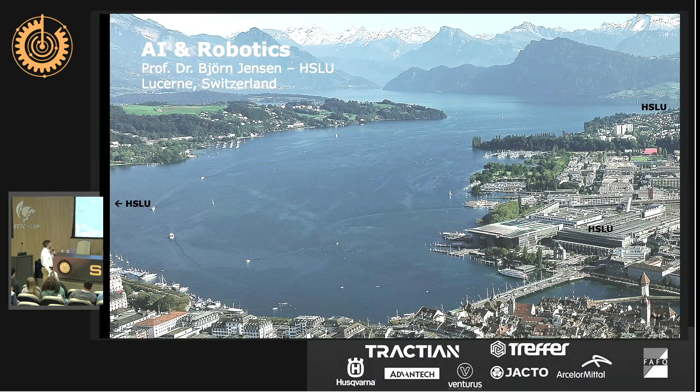So maybe you have been to Lucerne. I already met somebody who visited Lucerne. On the left-hand side we have the Rigi, on the right-hand side we have the local mountain, Mount Pilatus, and this is where we do our research and we work on our robots.

I wanted to emphasize where we're located, and it was quite difficult to get a view on the world where you have on the one hand São Carlos and on the other hand Lucerne. So I think if we drill a tunnel, and in Switzerland we drill a lot of tunnels, then chances are we would end up in São Carlos. But that just goes to show that if we interpret this as a mathematical implementation of a sphere and we fold it somehow in a hyperspace, then I'm sure we would end up being neighbors in the dimension of AI and robotics, which is something we all enjoy doing. So there's a similarity, there's a neighborhood, and we should definitely search possibilities to exchange ideas.

I'm going to start with the robotics part in a second, but just indulge me for the statistics on the home institution. The Universities of Applied Sciences in Switzerland were founded 25 years ago. That was a new development. We have currently 6 different schools, and roughly 2,000 people are working. We have 40 bachelor degrees.

Who of you is studying in a bachelor degree? All of you, okay. So which bachelor degrees are you in? Mechanical engineering, electrical engineering, mechatronics. Haha, very good choice, excellent choice. I tell you why in a second.

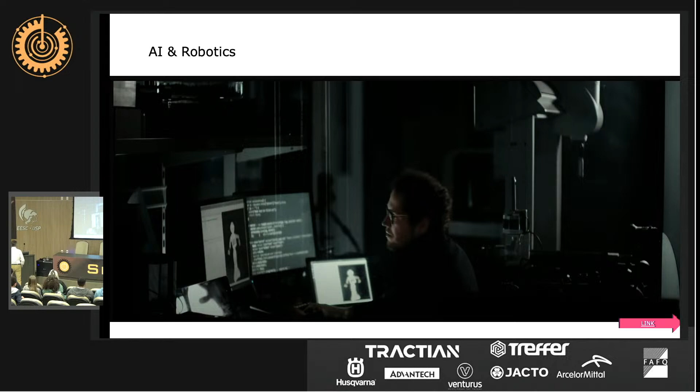Okay, so we have different areas where we are active. Of course, we do education, so the study programs, in the bachelor and the master. We have continuing education, so we keep contact with the people in the industry. We have applied research, and we also offer services to the community. In the last year, we launched nearly 380 new projects, most of them research projects, most of them in collaboration with the local industry in central Switzerland. And with that, I would like to delve into a study program.

Just switch. So you are all in mechatronics engineering, this is the field I work in, and we created a new study program. Unfortunately, the people will be speaking in German, but we have an online translation. Oh, very bad.

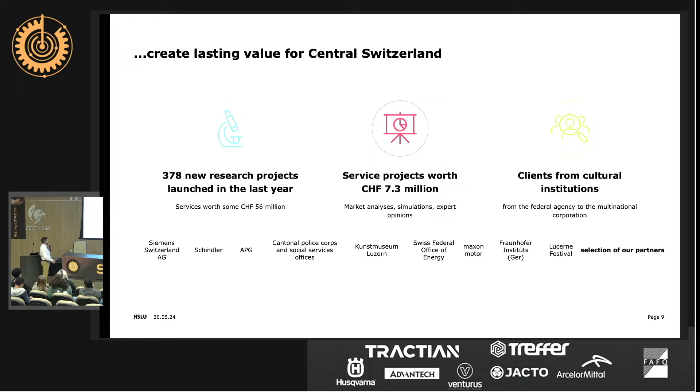They're very recent, very nice, and we attracted, I think, over 1,000 students in the last 5 years, so that is a tremendous success. All working in computer science, and a good part in the area of artificial intelligence. And now we also offer in the bachelor area robotics and artificial intelligence as a major. So we will lead them to the mechatronics program, to data science programs. Those are some companies we work together with, Siemens, Schindler. You probably know they have their headquarters. And then Fraunhofer, Maxon Motor, you're probably familiar with. So we have a number of interesting companies to work with.

We are working in 2 major areas in our research. One is focusing on spatial development and society, so that despite the changes, society functions. And the other one is digital transformation of the working world. And now, how does that look, the digital transformation of the working world? I'll give you an example. This is one of my robots.

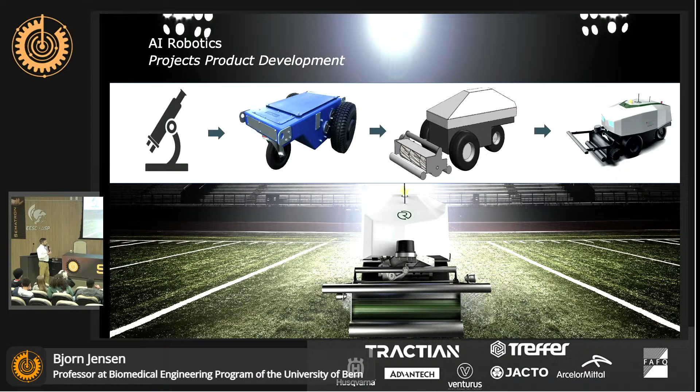In general, what we do is we are involved in research projects in my research group. That is innovation, closely collaborating with companies. Companies come to us with a challenge or a new idea. For example, here, that might be a fitting example. Here we had a company that wanted to create lawnmowers for soccer fields.

And the reasons being manifold. On soccer fields, the grass is very heavily used, so it doesn't have much time to grow. If you have your greenkeeper, usually he would be sitting on a lawnmower, but that adds just another 100 kilos to the pressure on the soil, just making it even harder for grass to grow. And it needs to be mown several times to have that perfect shape.

And ideally, the path you take is optimized, because on television you want the individual leaves to be folded in just the right direction to give the logo of your club or a nice pattern in the television cameras. And all this requires a lot of work. So the idea was, isn't it possible to do that with one of the robots? And this is a project that started very early on, and we could come up with creative ideas.

And one of the first things we realized in this kind of project, we cannot use GPS. Because most of the soccer fields have these surrounding places for the people watching the game. So there are walls, there is impediment to GPS reception, it's very limited, which gives you very coarse information and even spurious readings. And that would be terrible, because we need here a precision of approximately 1 to 2 centimeters on the robot to be able to trace the line directly to the penalty point or directly along the penalty area or the middle line.

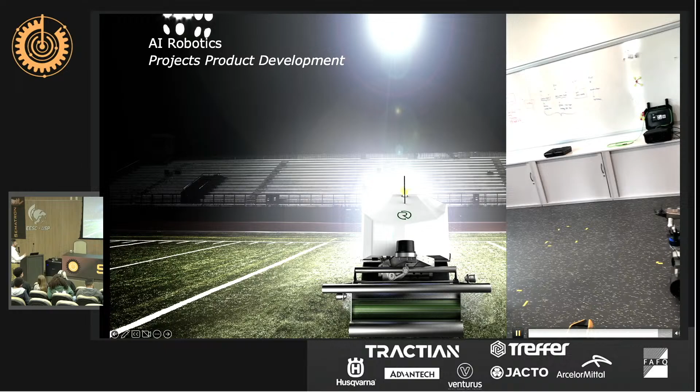And then you have two different ArUco markers. One allows the robot to follow you, so it will track the person and it will get an understanding of where the person is. And the other one is back up, because maybe you run into a one-way street and want to back up, and then you just switch the ArUco marker, and the robot will know how to back up.

Another interface that we developed, because interacting with the robots we usually have a lot of information, is using virtual reality. I'll show you in a second robotic competitions in which we participated, and we realized it's vital that the people working directly with the robot have as much information as possible. So what we did here is you see a 3D model of the environment.

This is our campus in Horw. And you see Mount Pilatus is also in the background. It's modeled. And the student on the right-hand side is equipped with virtual reality technology. He did his master's thesis during the pandemic. So he just started, and then we needed to virtualize the entire development because we were no longer allowed to come to the university and work on the project. That was an additional challenge that we faced.

And now we try to give you an idea of our campus. And now we're diving from the sky to the campus, to the green area in front of the campus. The following four buildings, they are the campus. And here you have the robot. You can give the robot a goal. It's running in simulation due to the pandemic, but it could have been one of our real robots as well.

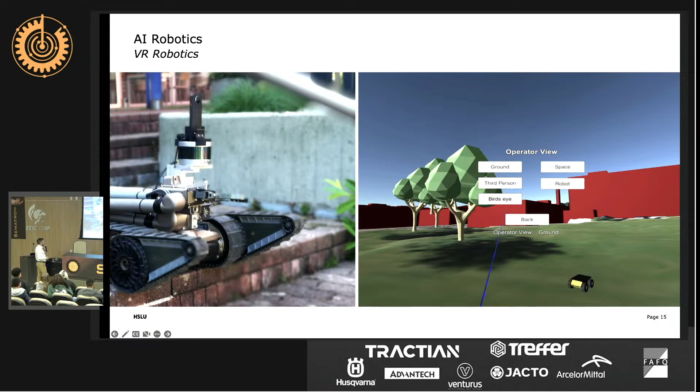Whenever possible, we participate in robotic competitions. So here I'm going to talk about a Eurathlon competition that was inspired by the Fukushima incident. So probably you still have memories of this when we had the issue with the NPP in Fukushima in Japan, and then soldiers were sent out to measure radiation. And it was really striking that in a country where so many robots are deployed, where there's a lot of robotic research, that in the case of an incident with really dangerous materials, still we would send people to the rescue. We would send people to take the measurements.

And this is in a framework of the EU that a colleague from England created that competition and said, okay, let's check if that were to happen in Europe, where would we be? If Japan isn't in the position to use robots, where would our robots be, and what would we need to be in that position? So they created a grand challenge that was a 1 week competition, and we were required to search for missing workers. So the idea is there's an accident and there might be some people hurt, maybe not able to move. Can we send in robots just to map the position where these people are, that when we send in search crews later on, we would exactly know where they are.

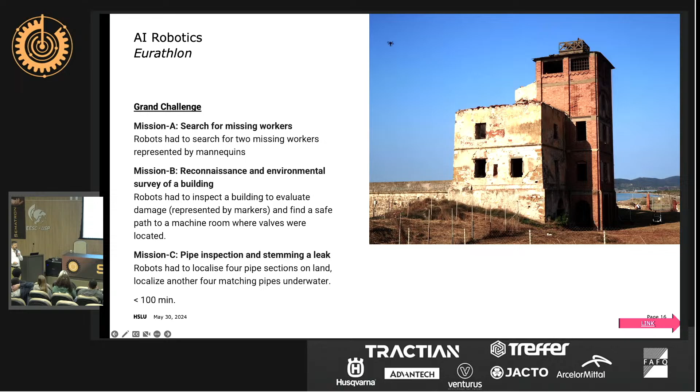This is the location, so it was a disaster simulation. Funnily, it took place on the beach in Italy. So you can imagine you have blue sky, you have sun, and you're on the beach. It's not very catastrophic, but it's just a simulation. It's a first start. And we had a multi-robot competition here. That was a major challenge. So it's not only the PackBot, our land robot that we needed to bring to the competition, but also we needed a drone. And we needed a submarine.

And I have never worked with submarine robots. The drone, we just bought one and we tried to make it work. It was a disaster, but it was necessary for us to qualify. Okay, there were other universities that were much better, but the submarine, I don't know. Fortunately, we could partner with another University of Applied Sciences from the northern part of Germany, from Kiel, that have been participating in submarine challenges for a long, long time. And that might be interesting for you.

Submarine robots is a great thing. A challenge is just if there's a problem, usually you kind of lose your submarine, because if there's a leakage, then everything is broken and you need to start from scratch. If that happens to my land robot, it will just run into a wall and I recover it. It's much easier. So it's a very challenging situation, and we just met on site. So we were grouped together online, and then we met on site, and we had 1 week to make it work. And that required also that the robots talk to each other. That different machines, different research groups talk to each other. And then the area for the competition was as follows. It's maybe hard to see.

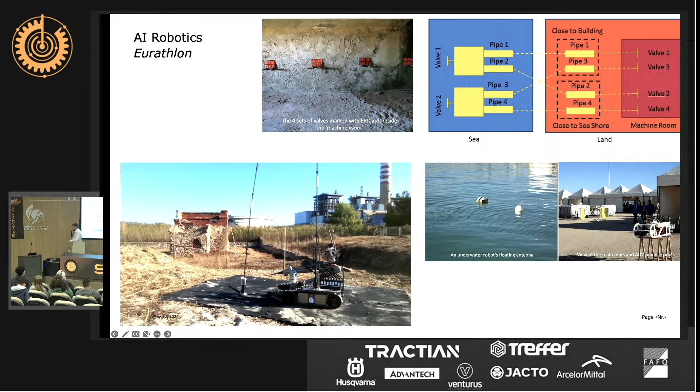The other thing you also see is the indoor nodes. So these are the outdoor nodes for the beach, and all these here are hacking devices, Pineapple hacking devices, which we just modified, and we could drop them on the floor, and they would create our mesh network. This is what you see over here. This is the mesh node dropping on the floor.

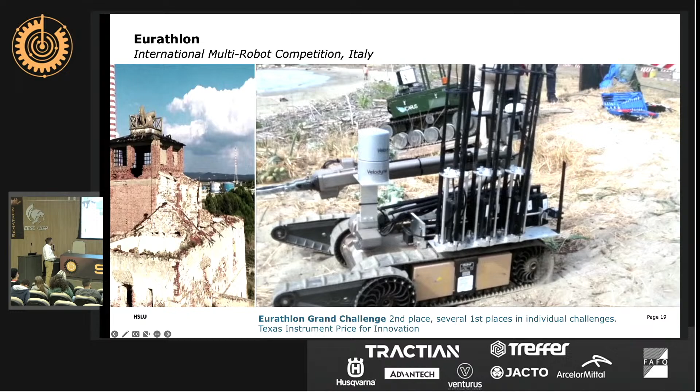We were quite successful in that competition. We went there with 2 bachelor students, so a small team, and we didn't have any expectations. And then after the first run, and I'm going to show you parts of that first run, we realized we can really compete with the other guys. What you see here in the image is the 2 teams that came in second in the Grand Challenge. That is us in the foreground and Icarus in the background. And the funny thing is, Icarus is an EU project that received multi-million dollar funding. We had a very tiny budget. We just had a great robot, and we received the Texas Instrument Prize for Innovation.

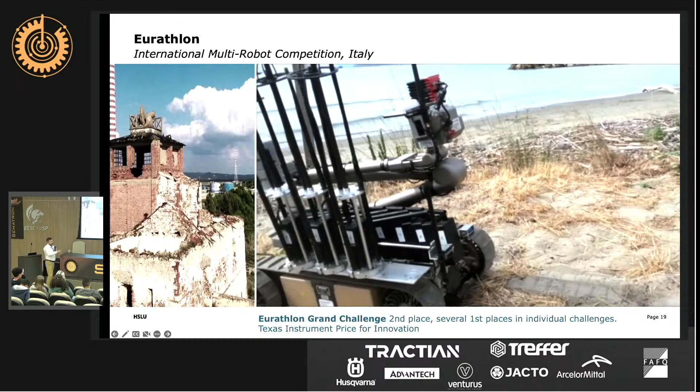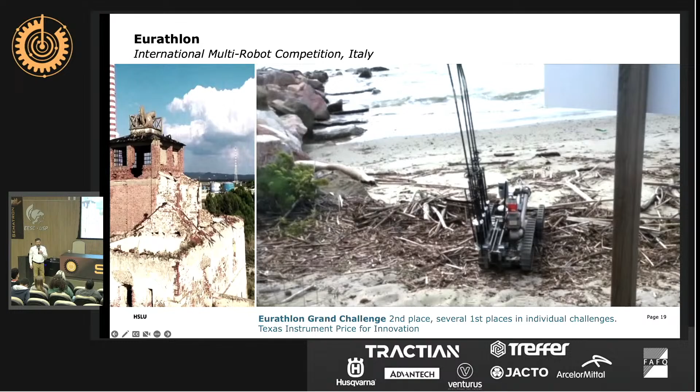So here we have all our outdoor antennas. This is a little bit mean. They wanted to help the robot and put wooden boards there. But wooden boards with sand, that is worse than an ice skating rink. So it's not the fault of the robot that it couldn't go there. We went directly over the beach. You can imagine the odometry of the robot was very bad in that context, in particular since we had a track-driven robot. We have an old Velodyne 3D laser. That red thing is a 3D camera. We have GPS information, so we could teleoperate the robot and tell the robot to go to the next waypoint. So it was not completely autonomous.

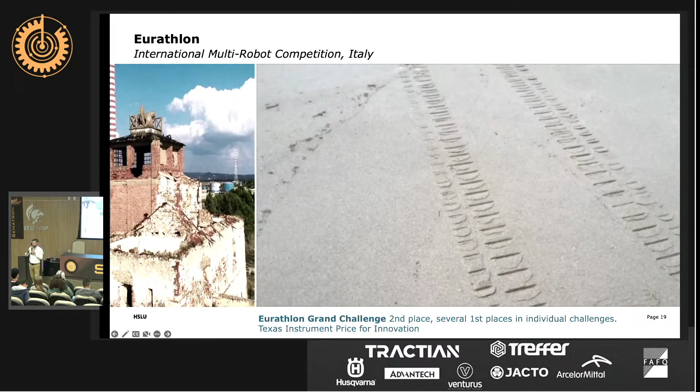That was a decision we took initially. We said we're a tiny team. There's only so much we can do. Let's do that interactively. So the robot was moving there.

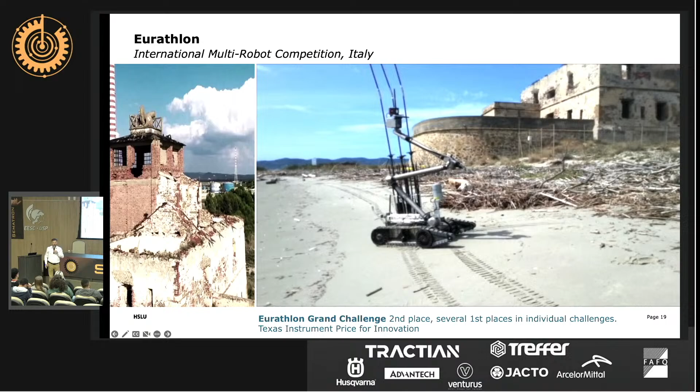In the yellow structure, this is part of the piping to be detected. And there you see the structure in which we had the machine room. So it's a defense structure from the Second World War or even earlier. I'm not going to show you the thickness with the hands because then I will move the microphone, but it's at least this. So no way that you could get Wi-Fi signals directly through.

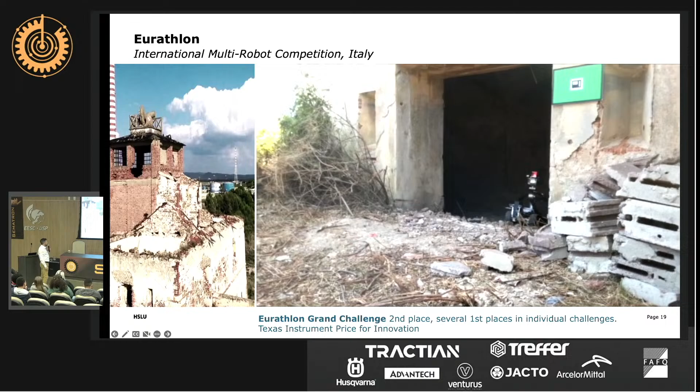And then we had to go behind the building. We were always hoping that the building with huge chimneys we would get next year, and then enter. Here you have an OPI that was detected with the camera, and we had to move over this kind of rubble. And the robot was distributing.

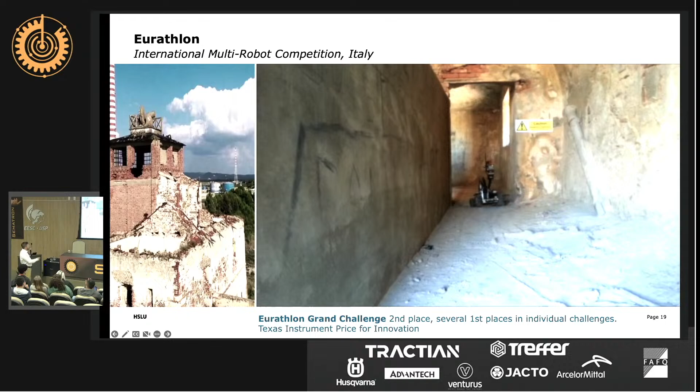Here you have one of the repeater nodes and then another repeater node. That was also something we needed to figure out manually. Now would be a good time to drop the nodes, and there we enter the valve room, and then there we can close the valves, and that was quite a success.

The following year, we had a competition in Austria. This is the nuclear power plant Zwentendorf, and that's a perfect testing ground because it's a complete nuclear power plant that never went into operation. So it's completely pristine. There's no radiation at all. The Austrian government decided slightly before inaugurating the plant to have a public vote on this, to get the support from the people. They did not get the support. They decided to abandon that plant.

And now for the robots, every 2 years there's a competition, a hackathon, where we can use that environment, the real environment, for our robots to see whether we can work with real radiation. Of course, we're not talking about radiation of a level we would have in an accident. These are radiation sources that are brought in by the Austrian military. They are still strong. We had tests in Switzerland where the military gave us sources. They were of much lower intensity. There we got strong sources, which is great for the mapping because you have less worry about the noise.

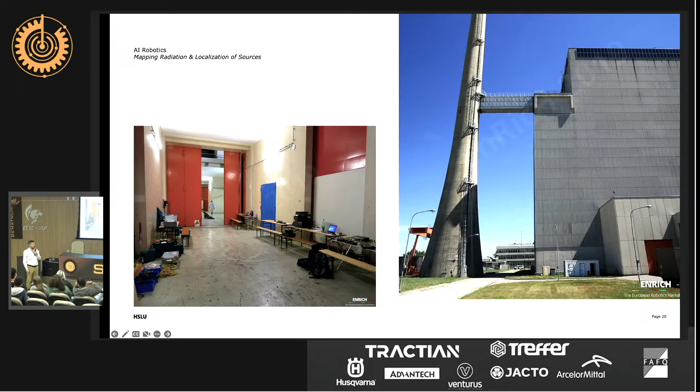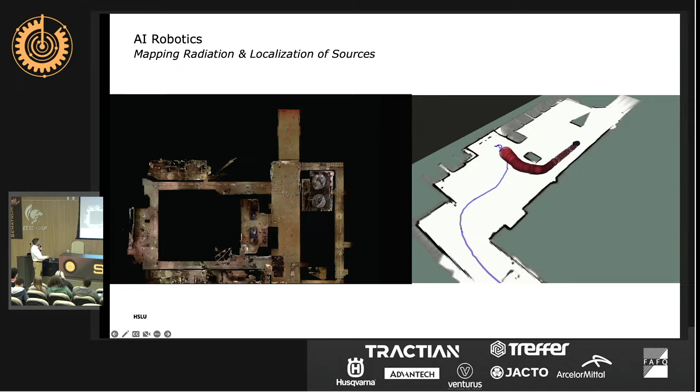And we have a starting pit here where the robots start, and then here you see, very similar to the other competition, we have one of the presumably hurt persons that the robot needs to detect. And to give you an idea of the environment, here we have a map of the environment. There are different environments. The pit is in the upper area, and then you enter through that door. Then they close the door again because there are radiation sources within. You're not allowed to follow your robot. That is very important. And then the robot would move in there, around the area, maybe here to the right-hand side if it's open.

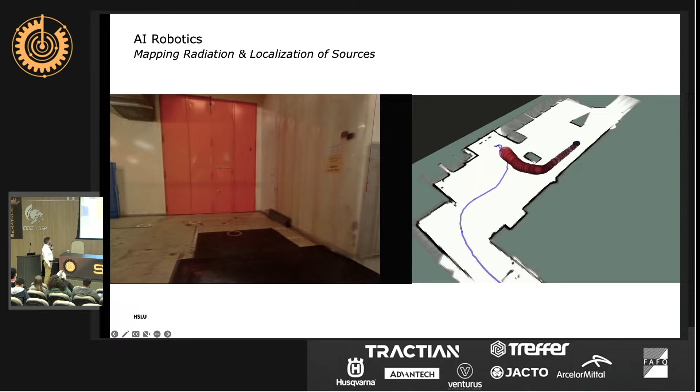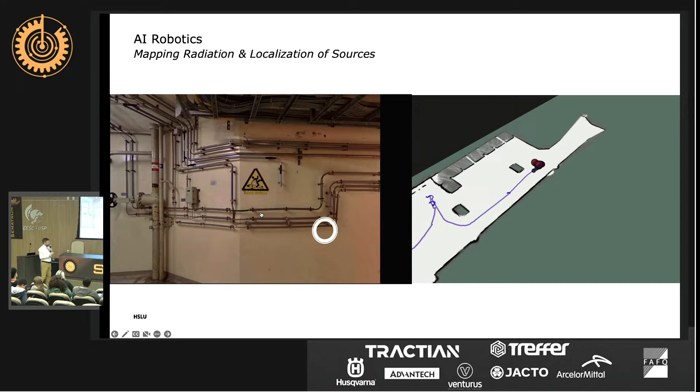All this time creating a map of the environment, logging the radiation and trying to figure out where the radiation sources are. On the right-hand side, you see a visualization of this radiation. So while the robot is moving, you can map radiation. Radiation mapping requires time. So usually you do an integration over a time interval and get a measurement. And for us, it's clear to see here at the starting point, there's a source somewhere in the area, and here we're coming close to another radiation source, so that helps already the crew to identify where dangerous areas are.

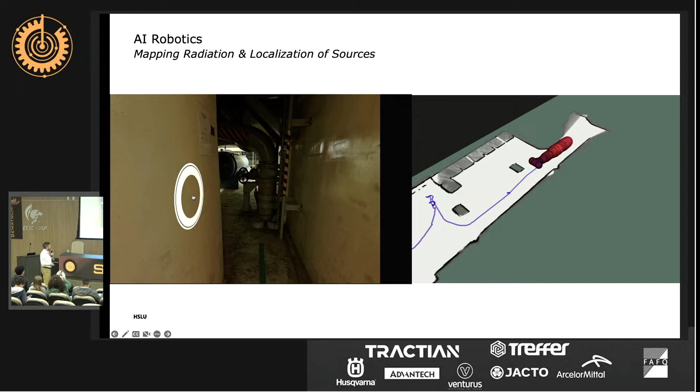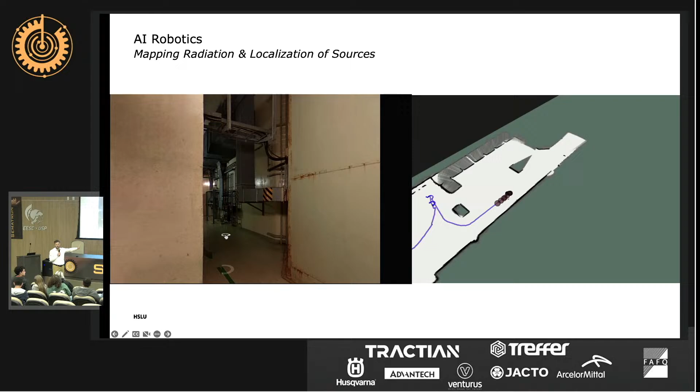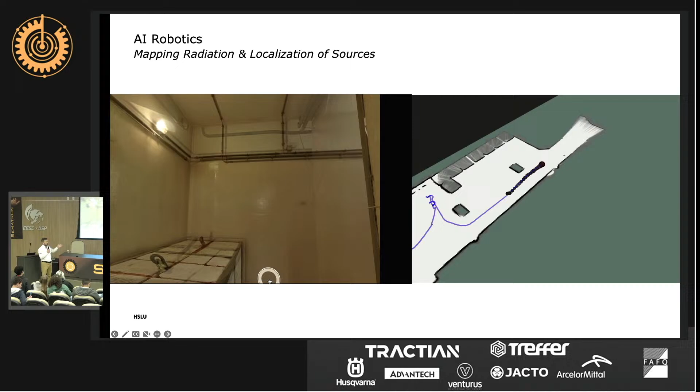This is only important in case of an accident. In regular operation of an NPP, people would know where radiation is. There are two states of an NPP. Either it's operational, and then the people have like a map, and they know exactly, don't go into this hallway because there's too high radiation, and here I can stay for a couple of minutes, it's not a problem at all. These will be verified every day, they will have regular measurements, but never anything changes. And then there's a state of revision, where you turn off basically the radiation part, and then you have lower radiation, this is the other state. But if something happens, then you have this challenge.

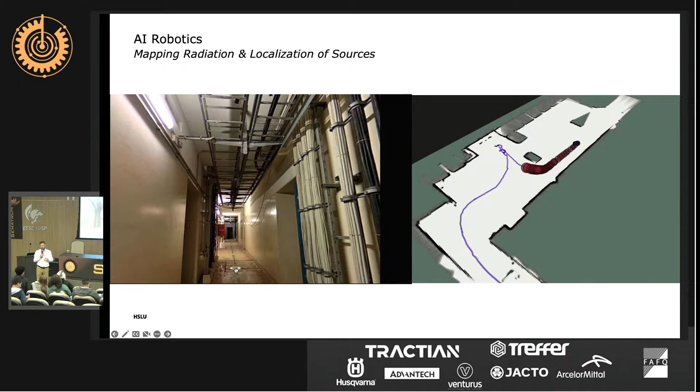It also applies to something that's happening nowadays in Switzerland. That's the deconstruction of the NPPs. As soon as you put them out of operation and you deconstruct, you remove the walls, you remove the shielding, then the distribution of the radiation is no longer the same, and people walking there and working there, because it's still a lot of manual work despite all these great advances in automation, then people would need to know, okay, here I can stay 10 minutes, that's okay, that's allowed. And this is where this kind of maps come in very handy.

Prior to that, the search crews need to use something that's called orthogonal search. So how does that work? You look at your measurement device and you just walk up as long as it increases, and when it starts decreasing, you know, okay, I have to back up, and now it's either left or right. You toss a coin, you try right, oh, it's going down, you go to the left. You can imagine how cumbersome that is, spending all that time being exposed to radiation, just to identify the source.

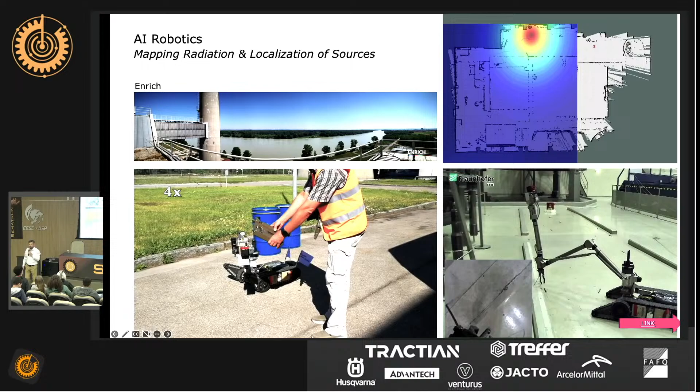And it's so much easier just to send in the robot, and the robot would tell you, okay, here is the radiation source. This information is a little bit coarse, so we went further. Here we developed a 3-point measurement, so our Mercedes star measurement. So the robot would be standing somewhere, and we would take measurements. So this is 4 times accelerated due to that time integration that we need to do. And you see the radiation sources just behind the robot, the blue elements there. And then from these 3 points, we could, of course, calculate where the source is located.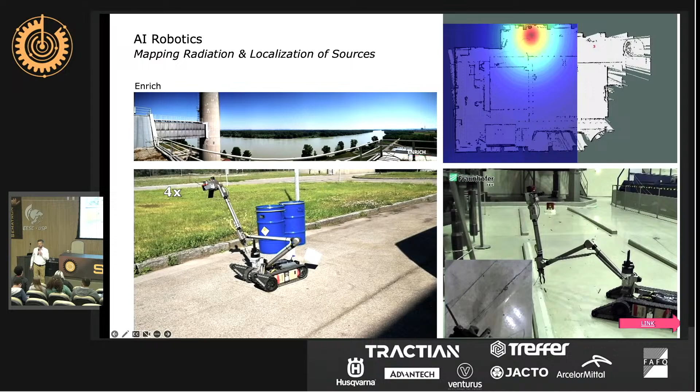Fortunately, radiation sources, they decrease quadratic with the distance. So there's only the closest one that is important. And on the right-hand side, you see the radiation map we created. So this is a different environment. This is the upper floor. This is really the nuclear power plant. And we were moved there with an elevator. And the robot got out of the elevator. And the first thing it did was it performed that 3-point measurement. And then we knew where to look for the radiation source.

It was on the opposite side of the area, and we could go there, and you see the robot, when it reached that area, there were pen-sized small rods all over the place, and the idea was, okay, there was an accident, a bar was broken into small pieces, and now the robot has to distinguish, there you see the robot moving in that area, the robot has to distinguish between sources which are really radiating and sources which are just metal. Because the metal or low radiation sources, the human helpers can collect, but the high radiation sources, the robot would grab and then bring into that bin with the radiation sign and drop it there.

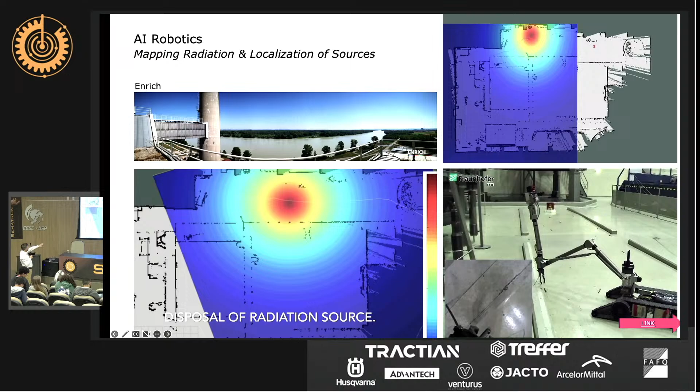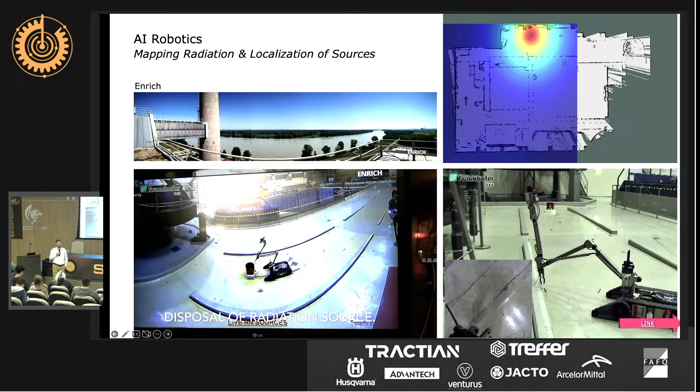And all this is under time limit, of course, and hence it helps enormously that we have that possibility to compute, okay, this is where we need to go, because the other teams, they were running around the environment and trying to identify where is the radiation, as we did in the previous run that you have seen. Yeah, and here it's dropping everything in the bin. Yeah, challenging environment for the robot, because they're not solid walls, there are obstacles, and we need to operate in that area.

Now I'm switching a little bit. Of course, it's great if robots and humans can work together. Here in the previous example, it was more sequential. The robots were preparing everything, creating the map, giving the information, collecting the information. But with the advent of collaborative robots, we have also the possibility to work closer together. So what we have here is a setup in the Swiss Competence Center for Robotics. It's not located at our campus, it's located on the opposite side of Switzerland. And there we try together with companies to do a gear assembly.

You're mechatronics engineers, so you have a very good idea what a gear is. And here the collaborative robot tries to assemble that gear. So it takes different parts. And the great thing about gear assembly is you need your force, you need to wiggle things to fit. And this is a technology the company specializes in. And what we brought to the table is the identification of the different parts. They're very complex parts. And the idea is that they can be put close to the robot, and then the robot would identify them and work with this. We use machine learning for the task. Machine learning requires lots of data.

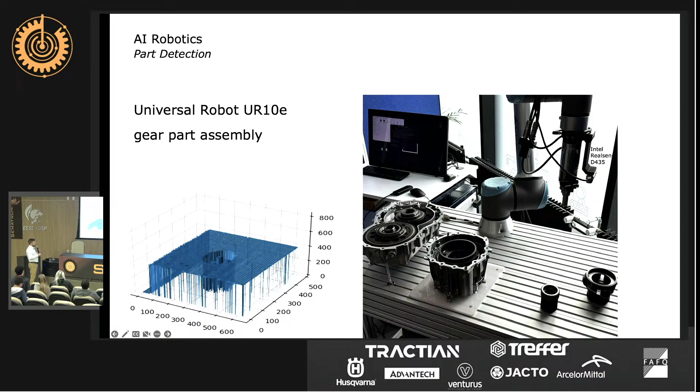I believe we took a convolutional neural network that now identifies the different shapes of the gear. And it's more than it seems. We only have 10 elements that we assemble, but every time you put one piece into another, you create a new kind of piece that you need to model and teach your robot. And this is something where people can be standing next to the robot. We also have a part where we do people detection, which I'm going to show you in a second.

Very similar, using the same collaborative robot, we are working towards applications in hospitals. That's a major challenge. We realized in many countries, in Switzerland as well, there's a high turnover in the people that are employed in hospitals. It's less the doctors. The doctors have tremendous stress, but somehow they remain in the hospitals. But in lots of the assistant roles, in the nursing part, in the assistance to the doctors, they have difficult working hours. At least in Switzerland they have.

Long time. If you work in surgery, you spend most of the working day in a closed room without seeing any sunlight. It's very special. You start early in the morning, you go late at night, you have to handle the loss of life because it happens. So it's a very challenging environment. And some of the tasks, they are prone to automation.

So we were discussing with a hospital in Switzerland saying, hey, we have robots. Here we have a mobile industrial robot, MiR, the white station, and we have that Universal Robot on top. Why don't we put it in the area of the surgeon, and then the surgeon can just tell the robot, give me this kind of tool, and then we can take the tool and we can work with it.

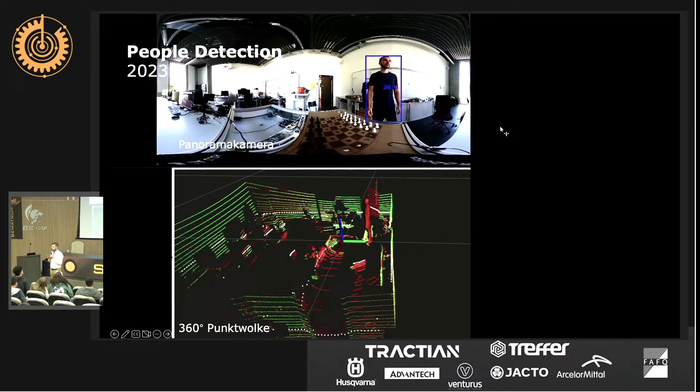So important for that is to know where the people are. And this is what we do here. We have people tracking. So we have a setup, a 3D laser, I think it's a Velodyne laser that we're using, and we have a 360-degree camera where we have a YOLO algorithm for people tracking running on top. And we can get both information, the angle, and we also get the distance to the robot.

We are working on getting more information, in particular out of the point cloud, so we would like to know the posture. But currently we just know where the people are, which gives us good information when planning the trajectory for the robot, so the robot would not accidentally hit anybody. And we can put that information in addition with the 3D model we have here and let the robot plan the perfect trajectory.

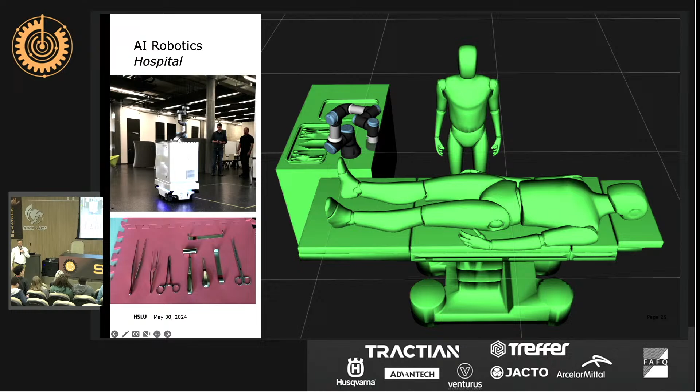Now, another possibility that we came up with to detect persons is Wi-Fi information. We stumbled upon that possibility, and I convinced a student to start a project on people tracking. I wanted him to focus on cameras because I know that works. And then he said, hey Bjorn, you gave me a bunch of references and there is that Wi-Fi solution. Can I work on this? And that put me under tremendous pressure because you need to give the students the possibility to succeed. So we had a backup plan.

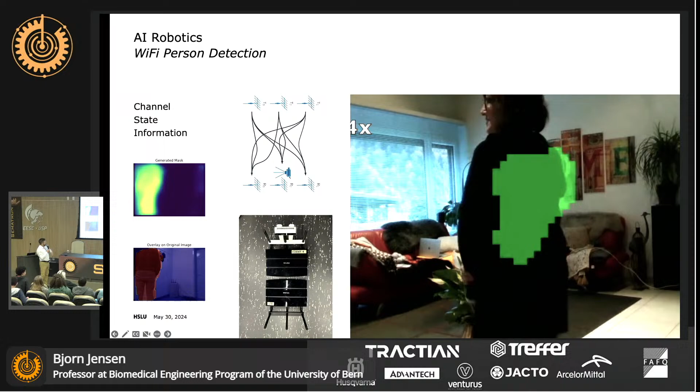And here you see the student in the parents' home taking measurements. So we have a setup here of Wi-Fi routers and a camera. The camera gives us the ground truth, so we know whether there's a person in front or not. We can easily compute that and use that information to train a neural network. The student was training actually two kinds of neural networks, and it relies on particular Wi-Fi routers which give you access to the channel state information.

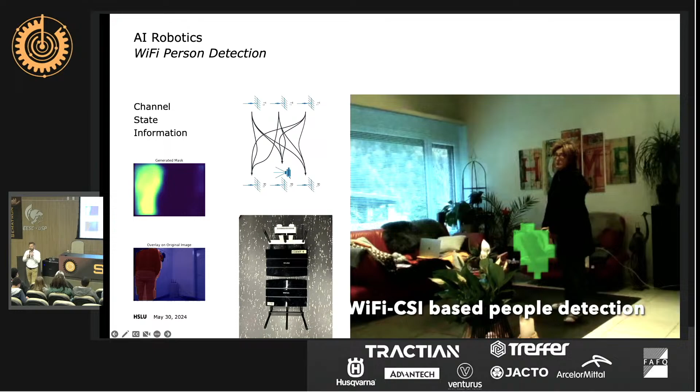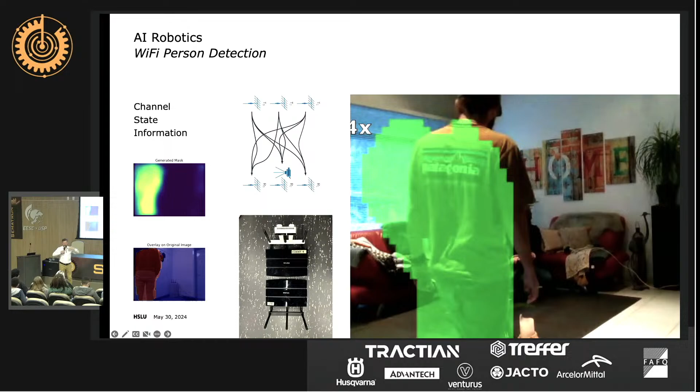Now the channel state information is sampled at a high frequency, and here we have routers with 3 antennas. So basically for each antenna you get the phase shift and the damping measured in the channel state information. And this is very useful because persons basically are huge reservoirs of water, so they highly impact radio communication. So the channel state information gives us very good information where persons are.

And learning from ground truth, here we had just a video, we could easily collect a huge amount of data, and the student could train the network, and that allows us to tell, okay, there's a person. This is a first step in that direction. You see there's some noise, but not very much. It's clearly obvious where the people are. It's clearly obvious which posture they have.

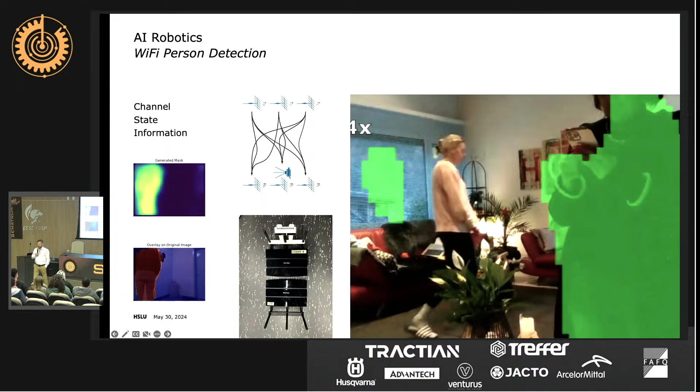And the great thing is, this technology is not at all invasive. If I were to ask you to install cameras in your home so we would know what you'd be doing, you would say, not participating in the study. At least I hope you would, due to privacy concerns. But everybody has Wi-Fi at their home, and if we have 2 of these systems, we can, without disturbing you, without even knowing it's you, we don't see your face, we just see there's a person, we know what is happening.

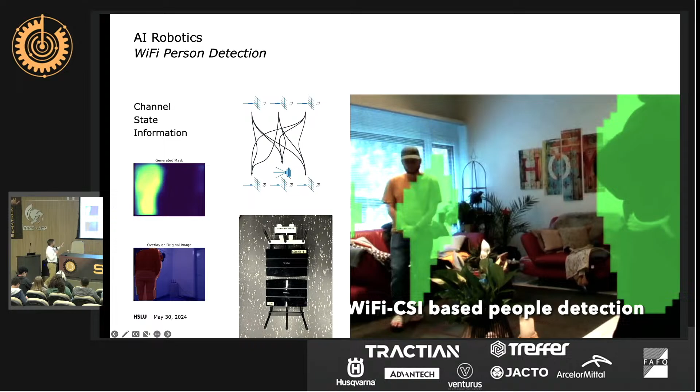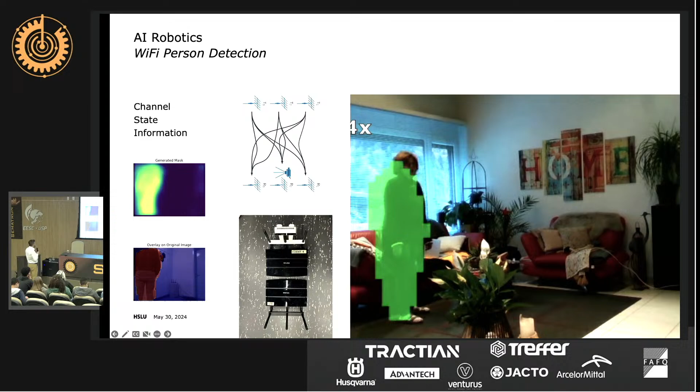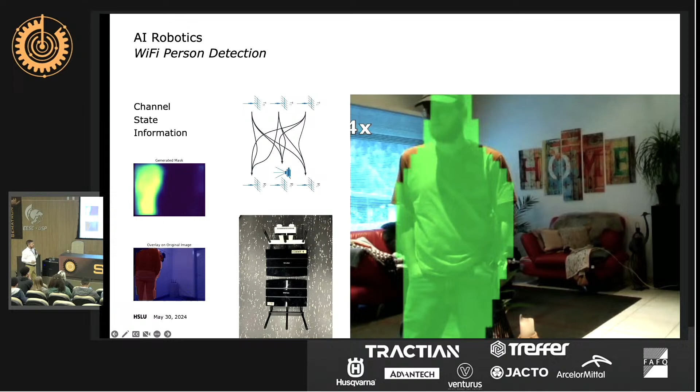And I see lots of opportunities here in the area of elderly care. When people get older and older, they are more afraid of living at home alone. They might fall, nobody might notice. With a setup like this Wi-Fi detection, we would quite easily notice without invading the privacy in any case. So this is a new development, and now we have ongoing projects because we believe it's much more than 2-dimensional information we can get from the Wi-Fi people tracking.

This is the digital festival. It's again our Pepper, now interacting with the people. This is a colleague from the university, and it's doing a conversation with one of our robots. So it's a very sequential setup. There's a lot of background noise, as you see. There is our chess computer.

There are legged robots in the background, and the robot listens to you whenever it holds up the microphone. So it needs some getting used to, and then it processes the answer, once again interfaces with ChatGPT, and then comes up with a very nice answer. There was a public demonstration for 2 days in Zurich, and at one point there was a woman visiting our booth, and she was very skeptical, and then she said, can I talk to the robot? Not excited, very, very skeptical.

So she sat down, and then she challenged the robot and said, do you know that art house movie from, I forgot the title, and I said, oh my God, art house. I wouldn't have known the answer. But due to the amazing complete database of ChatGPT, the robot just answered, yes, of course, I know that, and it's a very important movie, and I like this part, and I like this part.

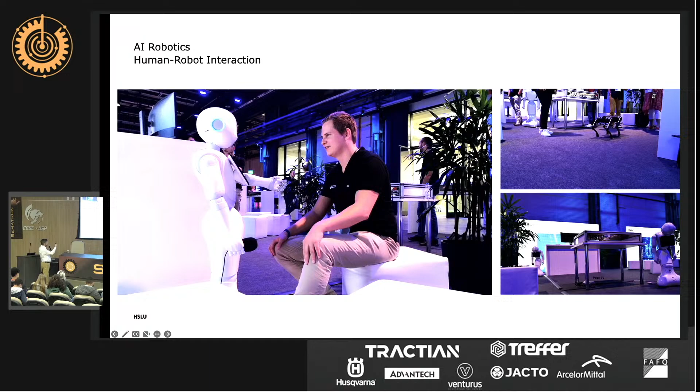And then she spent 30 minutes talking with our robot. So I was quite happy that we managed that challenge, and also in that environment with lots of noise in the background. We want to make robotics accessible, but also very safe. You realized that when I was talking about the hospital, where we had lots of constraints.

And the idea was to enable people to play chess, but physically, not in a simulation, but physically with a robot. And if you Google, if you look a little bit, you find there are accidents. So there was one, not with our robot, but there was a competition, I think in Moscow somewhere, and the robot unfortunately mistook the finger of a child for one of the chess pieces. And it grabbed and held on to the finger, of course, because it was a chess piece.

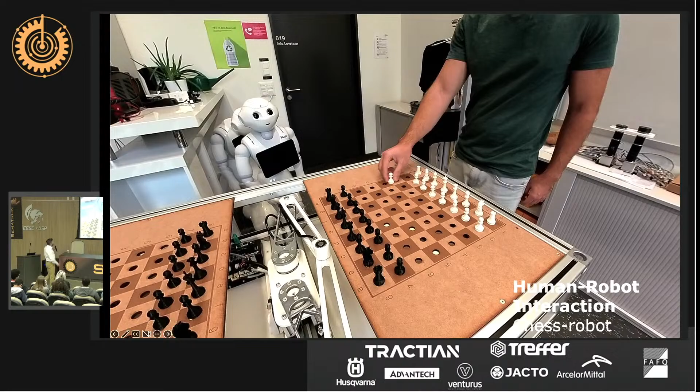So here you see the robot, the human player is moving, and the robot is moving the other part. And on the opposite side, you have a different player. Well, in this case, it's the same. And then the robot figures out what happens. There's a camera monitoring from below, so it's all encased in the table. And then this is the direction. So we can have a game. We're still working on it.

There are some things we would like to improve, in particular when we win one of the figures and we put it aside. But it's a very nice demonstration, and it's something a master student in mechatronics and automation developed in his final project. Other projects we're involved in are more in the artificial intelligence area.

So here we have on the left-hand side a garbage truck, and we optimize the routes. So it's a traveling salesman problem, which is very challenging and can become very complex. So it's NP complete, but if the graph is sufficiently small, then you can come up with the optimal solution. And this is just a smart part in that, to represent the graph of an environment, of a city, maybe that you get from OpenStreetMap, to make it computationally handleable, or come up with approximations where you know that within a certain percentage you are in an optimal area.

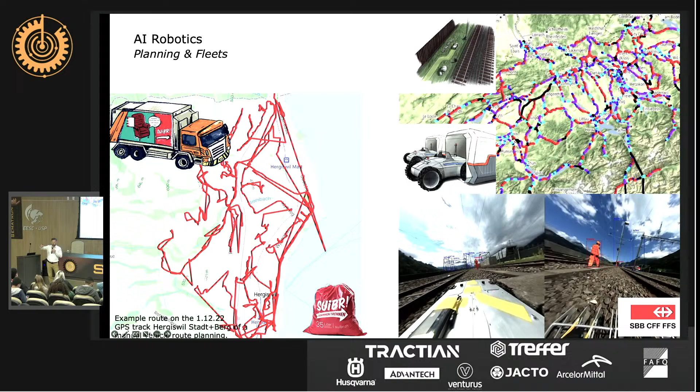You see different colors because there are different concepts. You could have a lawn mowing robot like you have in your front garden, or you could have a robot that is traveling day and night in one direction with recharging stations, and the different colors indicate that. That's part of the artificial intelligence part brought to that project.

This is something for you. We participated in the RoboCup in 23. Well, actually, we are participating this year again. And what I have heard is that next year, the World Cup will take place in Brazil. Please verify. To me, it came as a rumor.

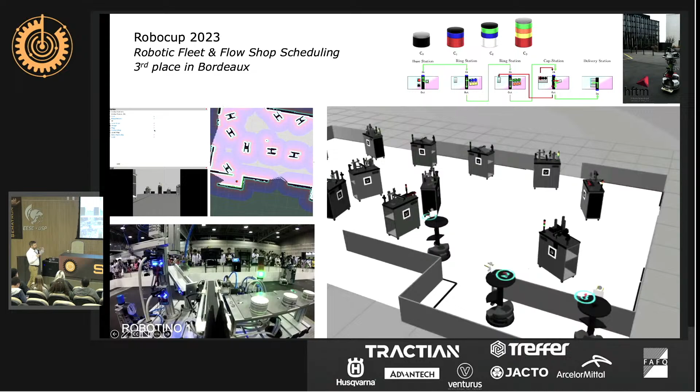You're probably familiar with the RoboCup. It has different leagues. You have the soccer leagues. You have omnidirectional robots playing soccer. You have the Nao robot playing soccer. But if it comes to your country next year, I would be very happy to see you participating with different teams and competing. We are competing in a very special league that's called the Logistics League.

The Logistics League, why did we select this? Because, well, we have that artificial intelligence and the robotics part, and I'm not sure how that is in Brazil. Maybe you can teach me, but in Switzerland it's extremely difficult to convince companies: let me take over your shop floor for the weekend, I'm going to optimize some stuff. Trust me, I'm an engineer. Yeah? It never worked. So here in the competition, we have a challenging setting.

So you see all these Festo workplaces distributed in the 3D rendering. They are put in different places every time, for every competition. So the robot needs to understand its environment, and then it needs to produce C0, C1, C2, and C3. This is a little bit difficult, so let's make it more palpable. You see these objects in the upper right-hand side. It's basically a burger place.

So you tell the robot, I want the plain vanilla burger, and then it just gets the buns and the meat and puts it together. That's the black and gray stuff. And maybe you want your burger with bacon, or maybe you want it with bacon and cheese, and then you have these other stations. And that means the robot has to figure out a path. In that area, you have 3 robots, so you can distribute the productions of the burger if you want.

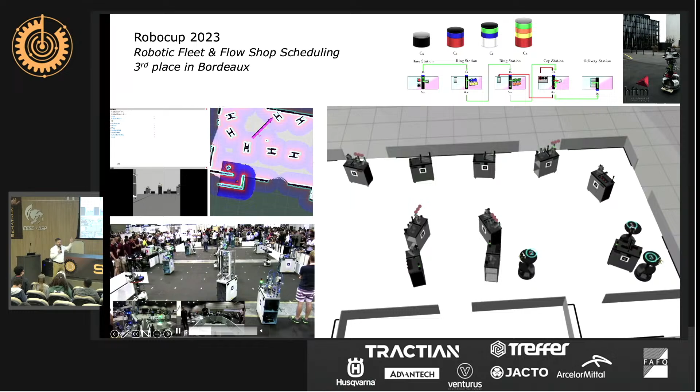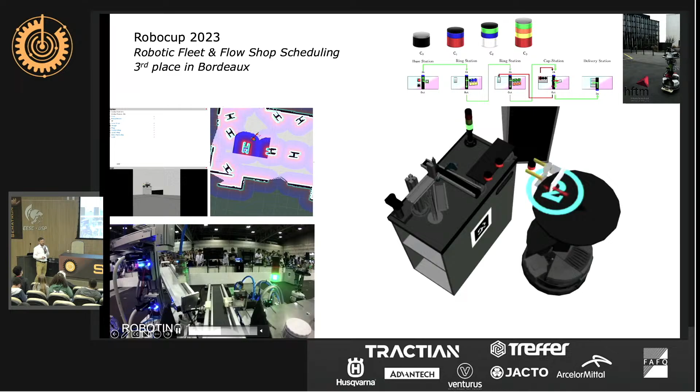minutes. And then the artificial intelligence needs to figure out, can I deploy my robot to produce that in these 3 minutes? If yes, I accept the offer. And if not, then I pass and move on to the next. So yeah, that's one of the leagues, besides soccer, besides social robots, and I hope to see you in that

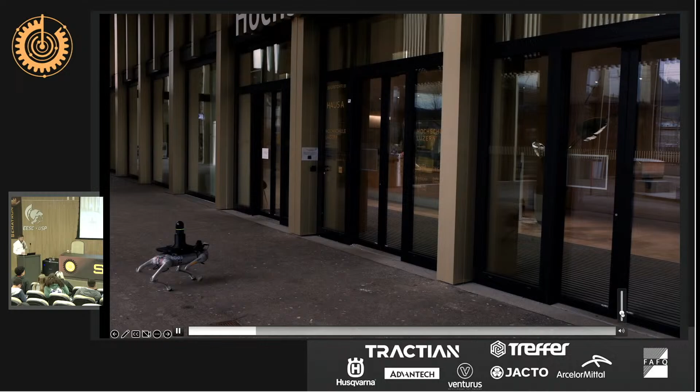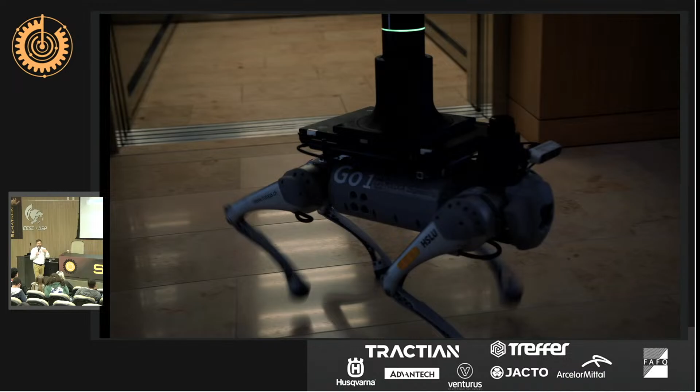So this is the campus we built 5 years ago. This is a lecture building. Robot enters. We have a Leica 3D laser on top of the robot. It enters into the lift. It's a little bit marketing. The robot does not know how to operate the lift. It's not that technically it wouldn't be doable. I asked for the API, but the service responsible for the building told me he wouldn't give it to me.

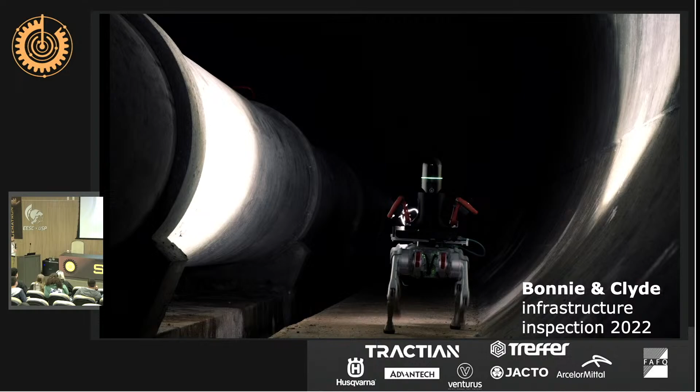We developed that together with a company, and here we do tunnel exploration. My co-workers were allowed to name the robot. We have 2 of them. They came up with Bonnie and Clyde, hence the name. And then we have lots of sewage tunnels in Switzerland, and by law they need to be inspected every couple of years. I think it's every 2 years.

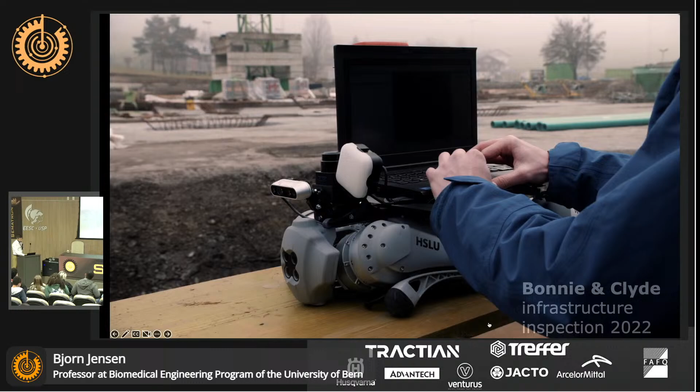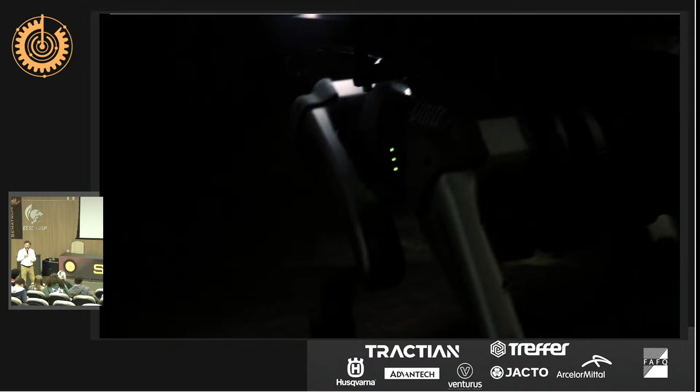An inspection of sewage tunnels sounds easier than it is, because here you see us preparing the robot. If you do that manually, you have to open the tunnel a day before to let air come in. Sewage might be poisonous, so you have to take precautions for human inspection. If you send the robot in, there's no risk at all. At the worst, you lose the robot.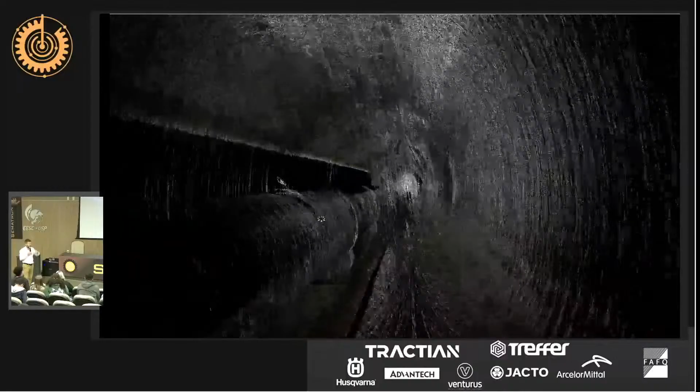The same technology, together with Tologa, the company that is interested in that. This is the 3D model we created from the tunnel. The tunnel is 1.4 kilometers. So we put the robot on one end and we send it, and it moved using basic wall following strategy. So it's very simple, very robust. And then it was just collecting the information and combining it to create that 3D model.

I have to admit, with the Go 1 robot we had to switch batteries in the middle of the area, so it's not yet a product, but I think we can agree that we can increase the battery size, and the robot now can move through this environment.

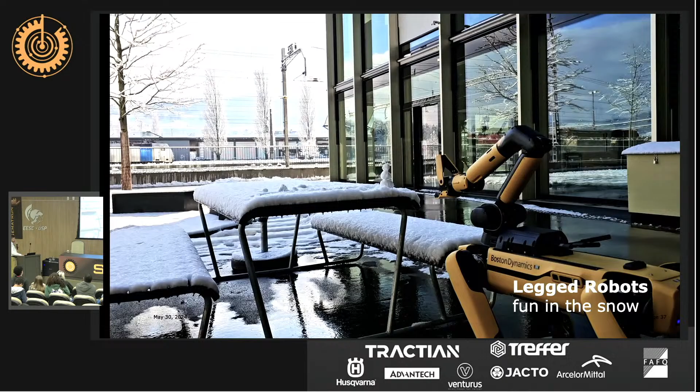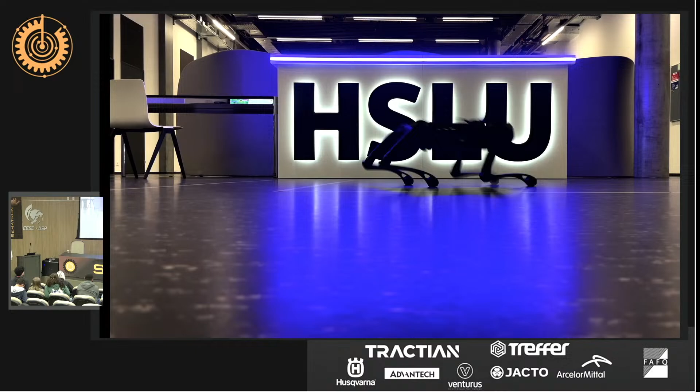Every now and then we also have fun with our robots, so we had snow a couple of weeks back. This is before Christmas. This is our new Spot robot, and we were preparing for that snowball challenge. With our projects, we hope to be able to make robotics jump. Here we have a new gait that was developed using reinforcement learning, and that worked with that.

If you are interested to get in touch, there are many possibilities. Talk to your professors. We are a very international campus. I'm involved in a study program where the head of the program is a native English speaker, so we have lots of courses in English. We have lots of courses in artificial intelligence and first of all robotics. You can also come for an intensive week over the summer if you want, and that is a possibility to get international experience. We are very interested in developing double degrees also in the master area.

And that is my insight into AI robotics.